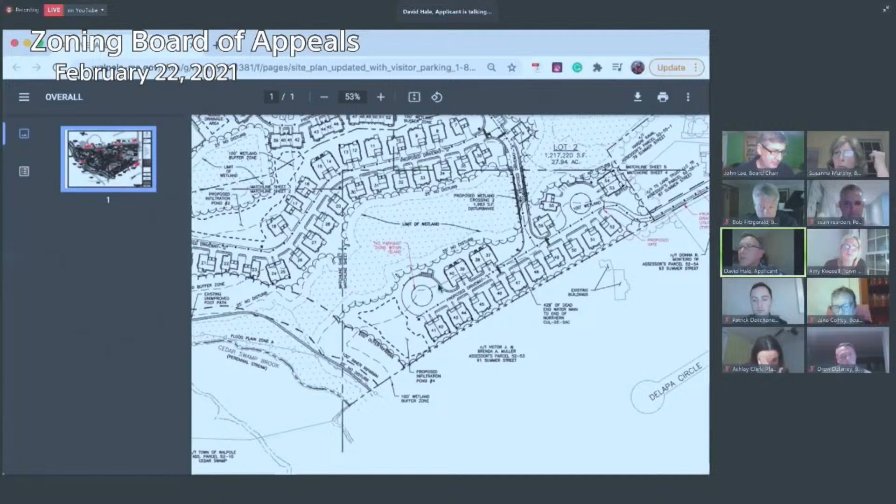One thing to keep in mind about the waivers is that they're by lot. So the first set of waivers that we're talking about apply to lot 1, which is the rental lot, but they're almost identical for lot 2.

My question is, if whoever's, Ashley, can you move the plan so we can see right there, units 41 to 52? Those are how far from, there's no side scale for the setback. Does somebody know how far those units are from the property line? A minimum of 10 feet.

Is that the building dimension or the projections into the rear yard? Or, yeah, rear yard, that's the distance between the property line and whatever part of the building projects. So there's a minimum of 10 feet to the deck. Okay, let's.

Okay, so the next one has to do with parking. The required parking would be 2 spaces per unit, and the applicant is looking for 1.87 spaces per rental unit. This is on the rental side again, as Mr. Hale said. The next is, again, with parking.

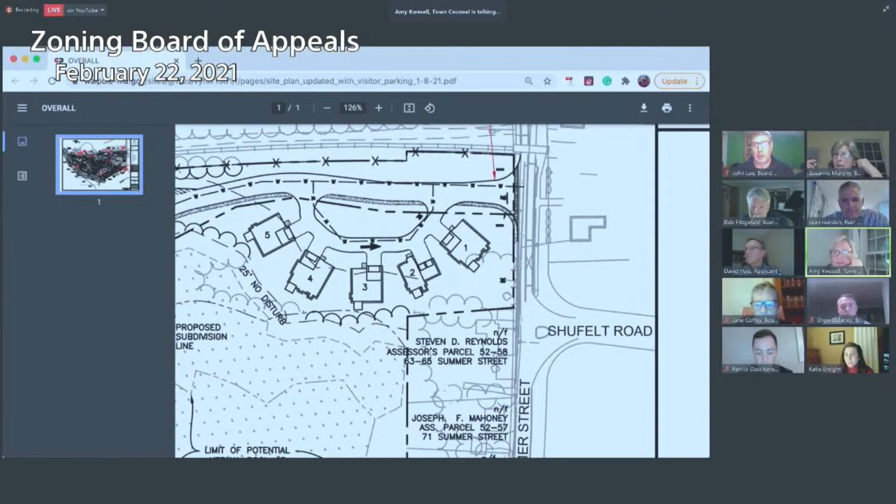They might not be located on this plan set. You can see the signs - you can actually see the two rectangles on either side of the site driveway, and they're labeled on the layout and materials plans. Oh, I see those, I don't see them labeled. This is just the one sheet we used for the meeting, it's not - it's in the 93-page plan. Oh okay, I only looked at the one plan, sorry.

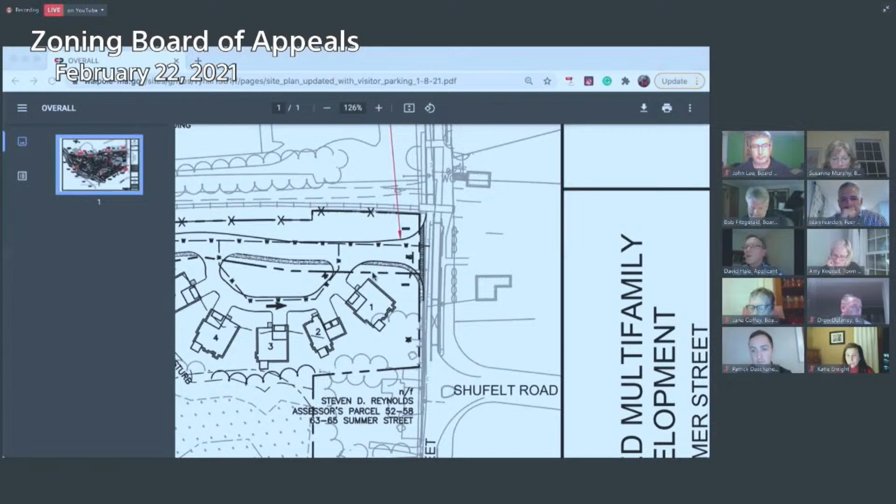I need the height. I need to know about sight distance. I need information here - I didn't know what those little black lines were. We can just hold it and do it later. We're gonna hold that one anyways. Gotcha, moving on.

So moving on to wetland bylaw and regulations, they're looking for a waiver from section 561 division 2, which requires a local permit be issued by the Conservation Commission. This is a common waiver because the ZBA steps in the shoes of the Conservation Commission.

And then going into stormwater, they're again requesting a waiver from that local permit requirement. The no alteration zone - the commission requires a 25-foot undisturbed vegetative buffer. They are keeping that 25-foot buffer area, except for the crossings and replication areas as shown on the plans, and the one-way section of driveway D. That's been since the beginning - they've held to that, to hold the 25-foot. So on this, I'd like to hold this one because I believe we have Landis Hershey from ConCom with us tonight.

So I just want to make sure that she's okay with these things. With the replication requirements, they're requesting a waiver to allow the applicant to provide reporting per mutual agreement with the Conservation Commission. That's a waiver that can be granted, but not necessarily in that form. It would have to be granted in compliance with, instead of a mutual agreement, because we need to know what that mutual agreement is. I would agree, Mr. Chairman, I'd like to hold that one for that reason.

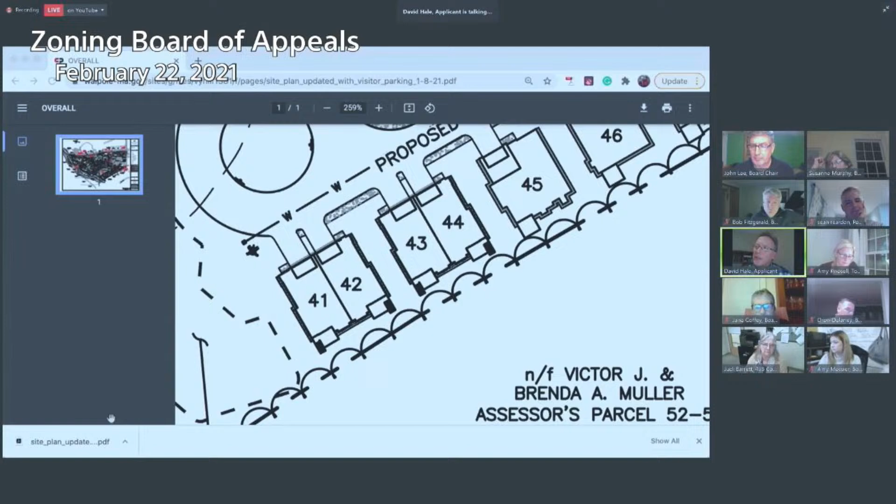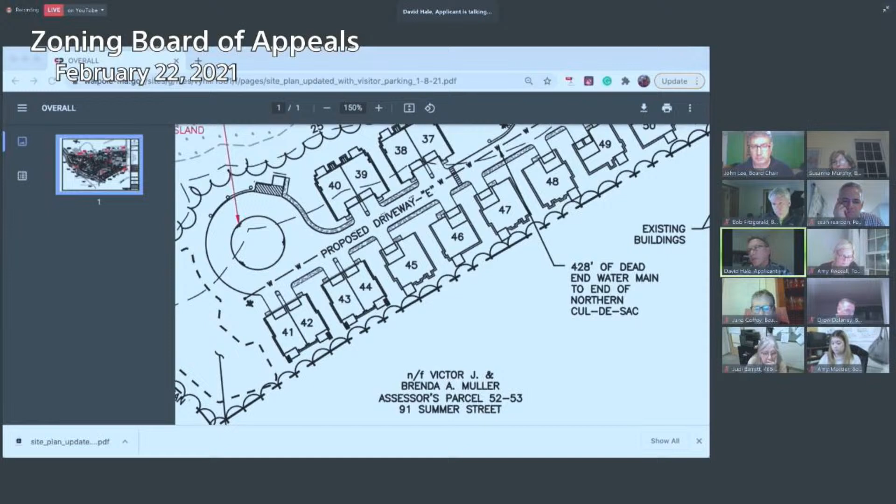I do. So I would ask the board to keep in mind that units 41 through 52, along that line, the grade of our properties is 6 to 8 feet lower than the adjacent property. And we've met and discussed our plan with the neighbor, who has not objected and has told us they wouldn't object. Their land is deed restricted, so they can't build - it's basically forested, and they're not going to see these units for the most part. They have tremendously thick vegetation, and a garage that blocks their view. We've offered to provide additional landscape screening, and this basic design has not changed since our initial application.

So the people who will live here will enjoy having a deck.

Okay, and what about the house behind 51? People live there. They're going to be able to see them growing. So that is the Muller's house, and that unit backs up to their garage. So from the back of their house, they would have to look through their garage, which is not something they can look through to see unit 51. And again, the grade is lower, and it's heavily wooded.

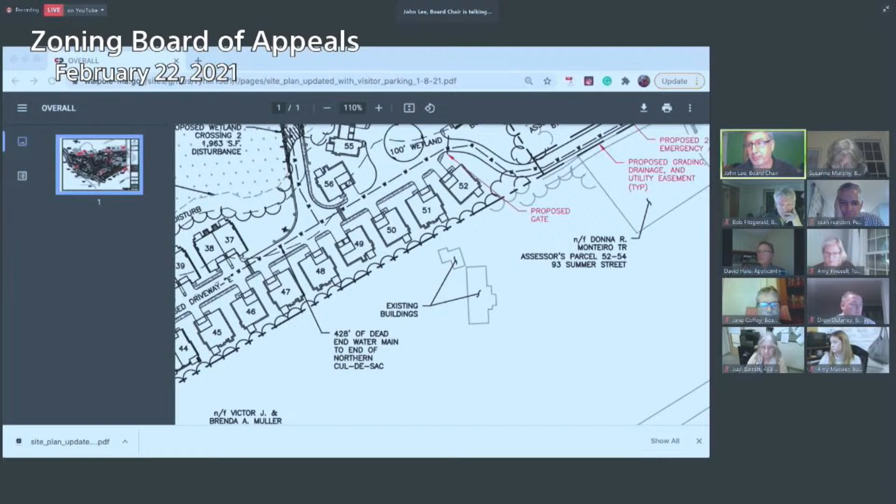Okay, Mr. Hale, thank you for the explanation. Possibly one of the conditions would be a vegetated buffer along that property line, just to protect both future residents and existing residents. Okay, I understand what you're saying as far as the grade and all. Okay, can we go to the next one, unless anybody else has something on this?

Who has to hold this on the visitor? I believe that was me, Mr. Chairman. I just was trying to get clarification about the allocation of spaces to units versus to visitors, and I didn't know how this 1.87 figure breaks out. In other words, the way I interpret the requirement is that for every dwelling unit, they are permitted 2 spaces per unit, typically under the zoning, and those would be available to the residents in that unit.

And I don't think what we're saying, but maybe we need clarification. I don't think what we're saying is that on average 1.87 spaces are available for each rental unit. I think what we're saying is a certain number will be available, sort of designated for that rental unit, and the balance would be a visitor space that would not be assigned to a unit.

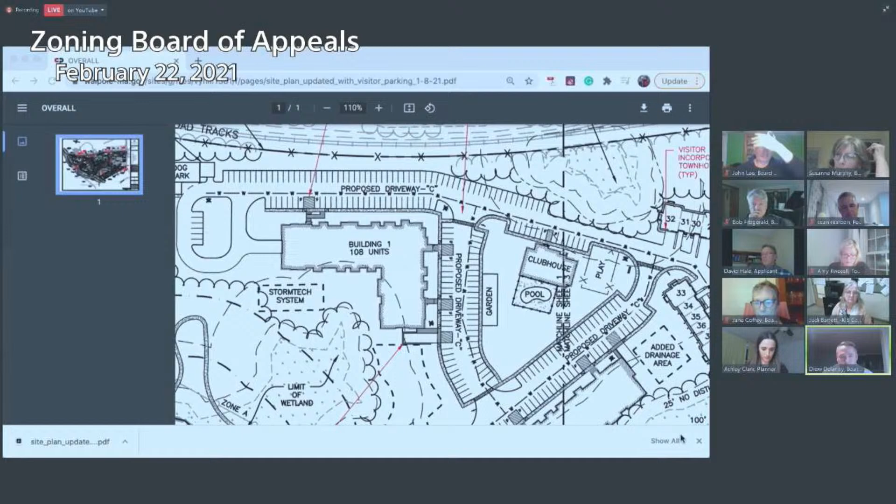So does anybody have anything else on the interior parking islands? I think we all see, you know, the bylaw is intended to break it up, make it so that it's a more livable place, with plantings usually. Yeah, usually plantings and shade. Make it look nice — shade trees, and that's what's being proposed, and you know.

They want concrete jungle. I can bring up a landscaping plan if that's helpful for context.

It's really not, because what we're talking about is probably about 45 parking spaces all in a row, and a lot of thought goes into designing communities with islands every 13 or whatever it is in green space. So, and I know we did make some progress on green space on this, but when I'm looking at these large parking fields — and I know with even shopping plazas, they wouldn't allow it because you want to have it broken up — but this is what the applicant's proposing.

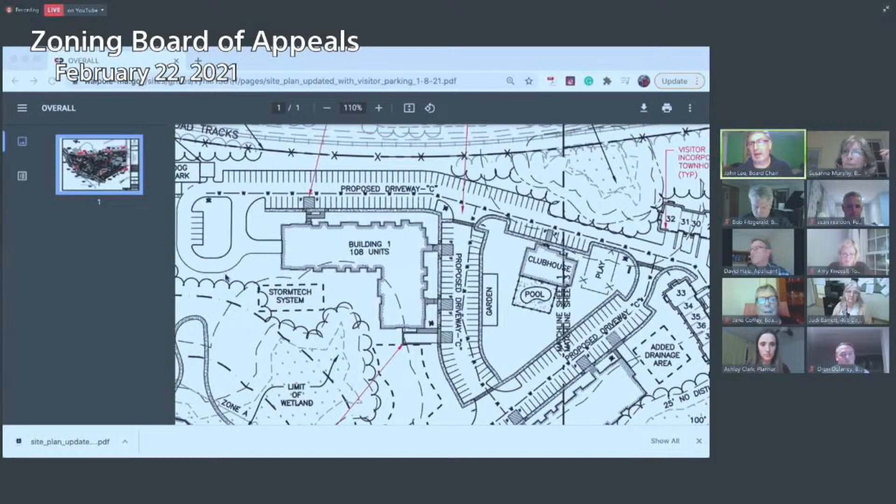Okay, Ashley, can you go back to the waivers? Was there any more? Sorry. Did the board want to discuss that any further, or should I remove the hold on it? I mean, if they want ugly, they want ugly.

Well, it's not completely beyond our authority to require some sort of islanding, maybe not to the extent that the bylaw is, but if we feel strongly about it, to break up the parking field, it will raise questions about whether providing a certain number of islands renders the project uneconomic, but, you know, that's — Mr. Chairman, if I may.

That's the balancing act. So this is a very typical design for multifamily housing. It's absolutely industry standard. There's very little vacancy in rental housing, particularly in the suburbs, and people will love living here.

I believe we have testimony from your reviewer that would suggest otherwise, but. So, you know, yeah, Bob, let's just, we can hold this, because I think we still have questions on it.

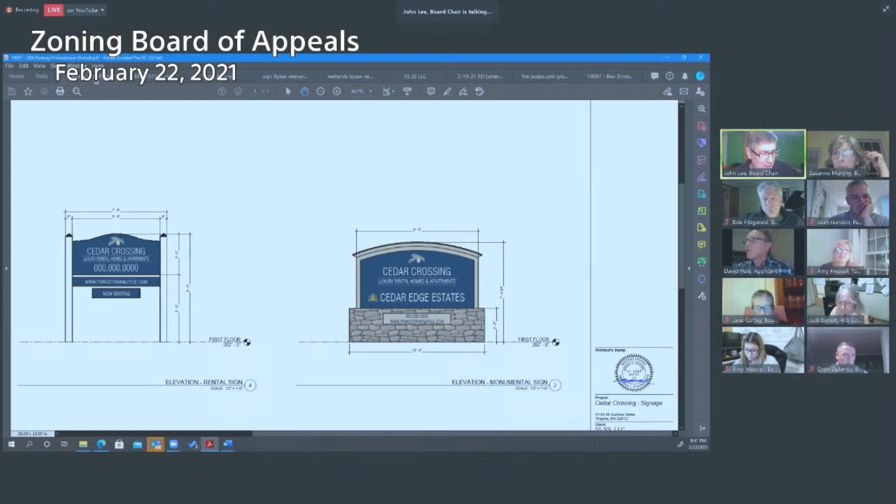Mr. Hale, I'm looking at the plan. So one of these signs is going to go right at, they're both going to be at the entrance of the development on Summer Street. Is that the proposal? Yes. Okay, so the monument sign is shown on lot 1, near building 1, and the marketing sign is where the hand was, right there. Okay. So those are the 2 signs that you're requesting.

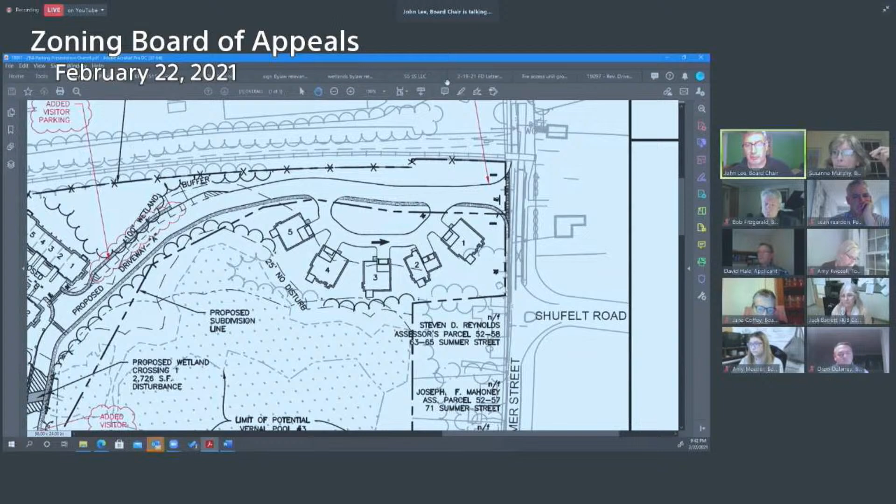Correct. Okay, so you're going to modify the waiver request to remove the bit about the second marketing sign, yes. Okay, does anybody else have questions on signage? Okay.

All right, where are we? So, Ashley, is Landis Hershey still with us? Landis is no longer here.

As I went through these, I was okay with them, but I wanted to know from Concom what their input was, since they've had ample opportunity to work on this and have been doing the state permitting requirements. I wanted to make sure that if she had anything to say, we'd address it tonight, but since we don't have her here, I think we'll just have to get back from her.

Does anybody, Ashley or even Amy Messier, know if Landis had any comments for us on this? I have not gotten any comments specifically on this from Landis. Given that we still need some additional information on some of the other waivers you've identified, I can share this list with her and get that feedback for you for the next meeting.

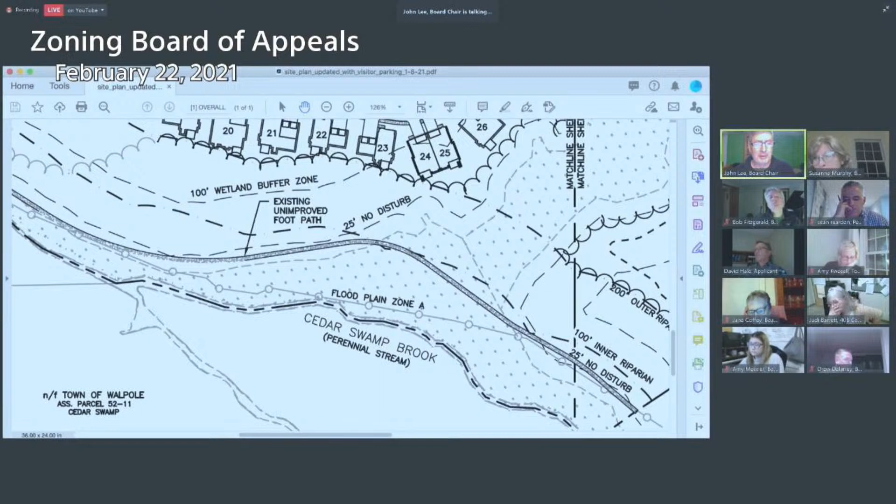Okay, the next thing I think we have is the water and sewer department, water entry fees, and we've got some of those numbers there. The sewer and water department has specifically requested that we do not waive any of these because they provide water for the entire community, and part of how they keep a good system going is charging entry fees and connection fees. So I, at least myself, would not want to grant this waiver because it's necessary for keeping a good water system for the town.

Board members, any other thoughts? Agreed. Agreed. Bob? Agreed. Drew? Agreed. Okay, and how about the same thing for sewer entry fee? Anybody have any reasons to approve that waiver? Okay.

How about building department fees? Again, would support the quality of the town and the entire community, I would be opposed to granting this waiver. I agree, yep, me too. Agreed, and I think that's consistent with our prior decisions on this application. Okay, Drew? Agreed. Okay.